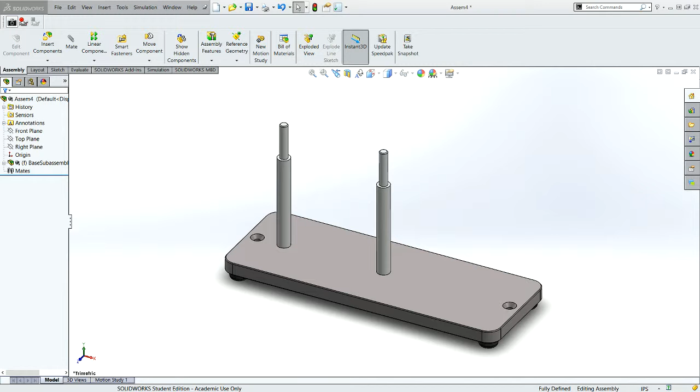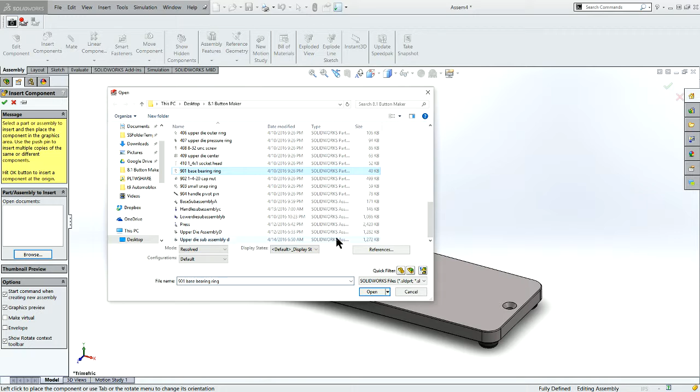So if we look at our assembly document overall, what we have to do is we have to basically put the rotating die assembly, the blue thing, on top of the base with a washer in between. So let's find that base bearing first, and that's part 901. We'll go ahead and insert components, browse, and I'll scroll down and find 901. There's my base bearing ring, and I'm going to place that.

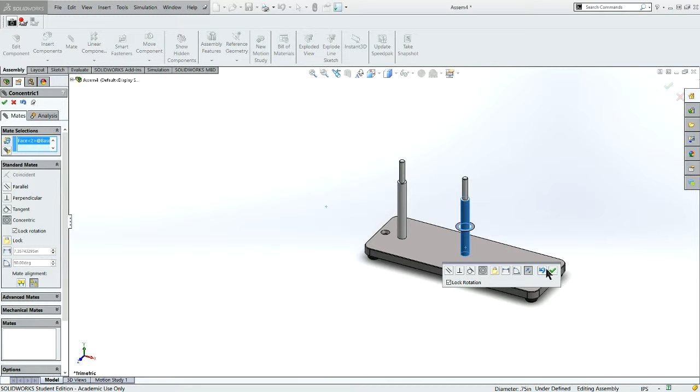I want to go ahead and mate this, and what I'm going to do is zoom way in until I can pick the inside ring here. So there you can see the inside ring, and I want to mate that about this center post right there, concentrically. And I can lock rotation, and I'll accept that. There's no real right orientation.

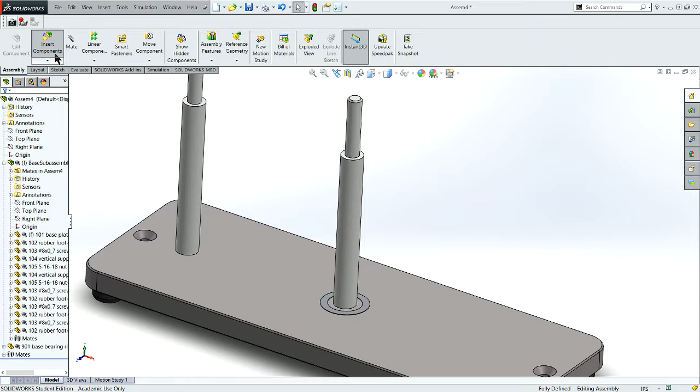What I'm going to do is I'm basically going to put this spacer so it's in contact with the top of the base. Now I can drop my lower die subassembly B onto that spacer, and that is what keeps it from dragging across the top when it flips back and forth. So let's get out of this assembly, insert my components, and I want to insert subassembly B. Again, I can filter where my cursor is flashing, look for subassembly B, open it, and lo and behold, it places and looks reasonably appropriate.

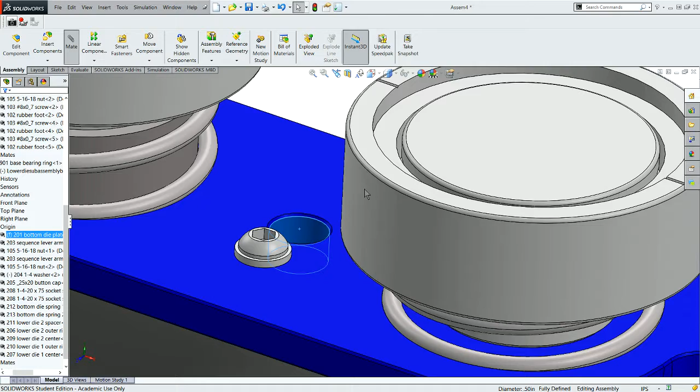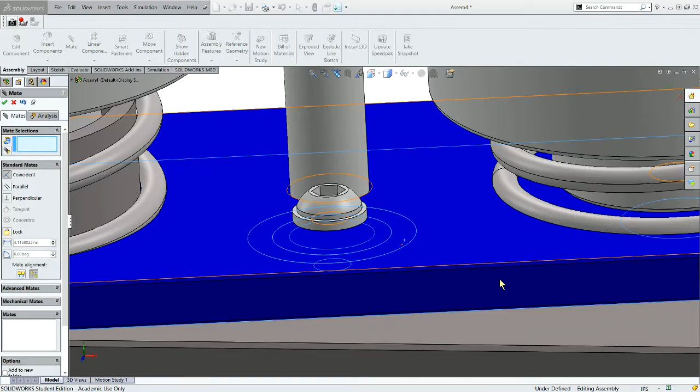So as we look at this, I want to place this center shaft hole, and I want to mate that to the center shaft. I don't want to lock rotation on this. Instead, I want it to spin. So we're gonna basically orient the bottom of this so that it touches the top of the face of my spacer. And if you look at it, there should be a tiny little gap here, and there is, and it is tiny. So now it spins, but I've got to limit the range, and I want to limit it from here to there.

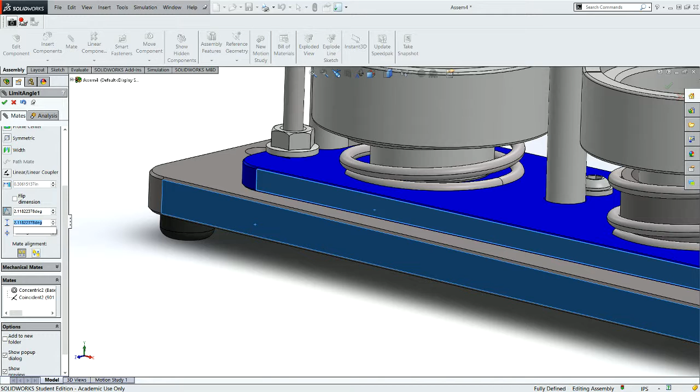There's a couple different ways I can do it. I can turn on planes, but I'm just going to use these 2 surfaces right here. So I'm going to mate these 2 surfaces, except I'm going to do an angular mate here, and then I'm going to go to my advanced mates, and I'm going to go from a minimum of 0 degrees to a maximum of 180. Let's go ahead and accept that, and let's see which way it flips. And there you can see I can go back and forth between those 2 positions. And I'm fully defined.

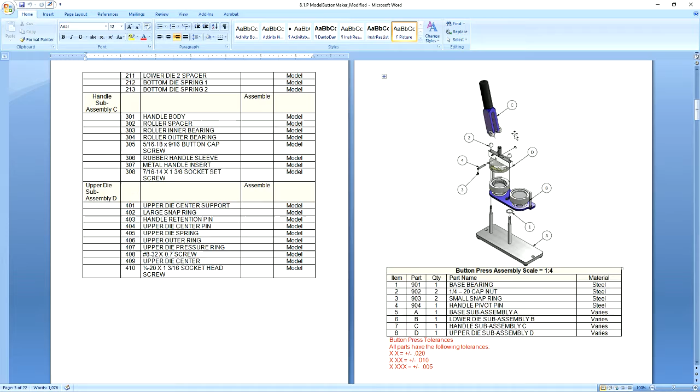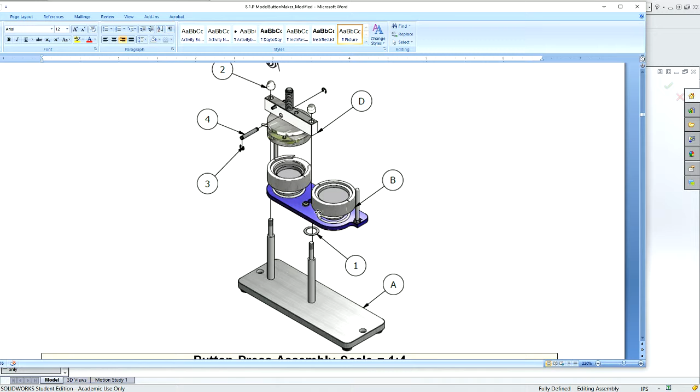I'm going to leave you off at this point, and we'll pick up here in a further subsequent video. But at this point, I want you to go ahead and put your upper die assembly on, and realize this is going to move up and down these bolt shafts. So you need to make it concentric about the bolt shaft. Put the nut on the top and then limit the range so that this top of the upper die goes between the upper bolt head and the lower bolt shaft.

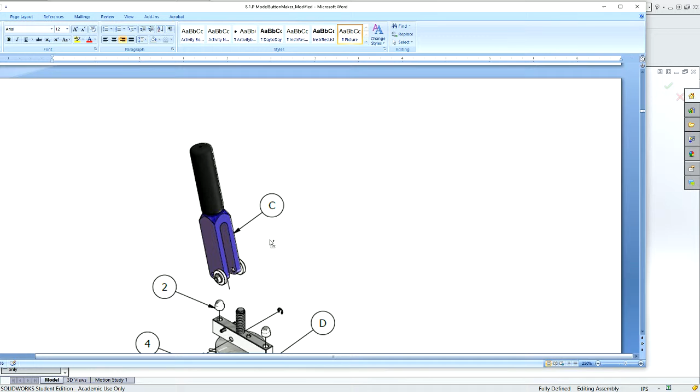And then the next thing you're going to do is put this pivot pin in with 2 snap rings through the handle, and you will mate this handle bearing right here so that it rides atop the die assembly right here. And that's what moves it up and down. So give that a shot on your own. I'll make a subsequent video and we'll take a look at how I did it.